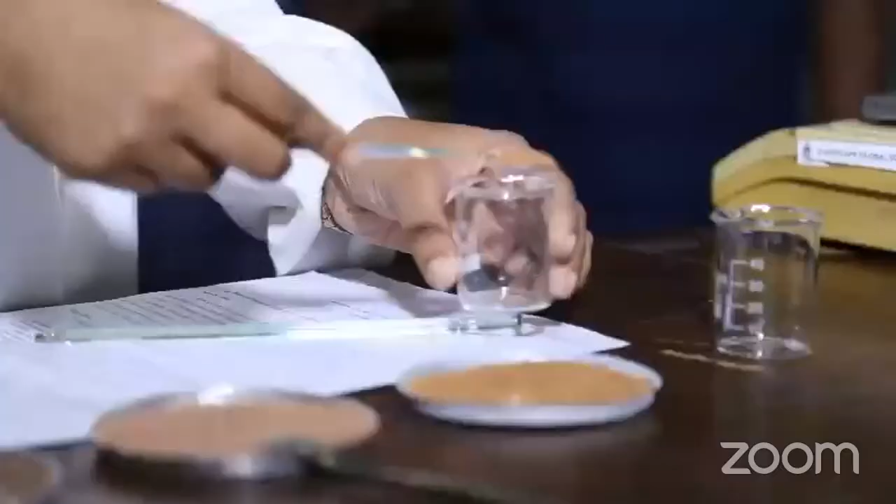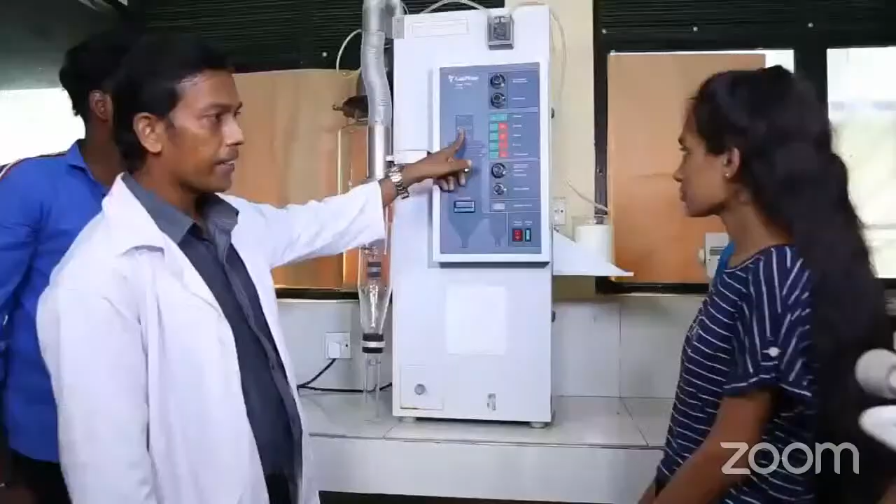After completion of my 2-year diploma in agriculture program, I entered the OUSL BIS agriculture program for the continuation of my further education. As a person who engaged in the field of education management and industry training in Sri Lanka, I serve my valuable knowledge for OUSL as a visiting academic and industrial expert on a regular basis. Highly experienced, well-behaved and well-qualified staff members at my OUSL life. I think it was a very good opportunity for the continuation of my education under the field of agriculture.

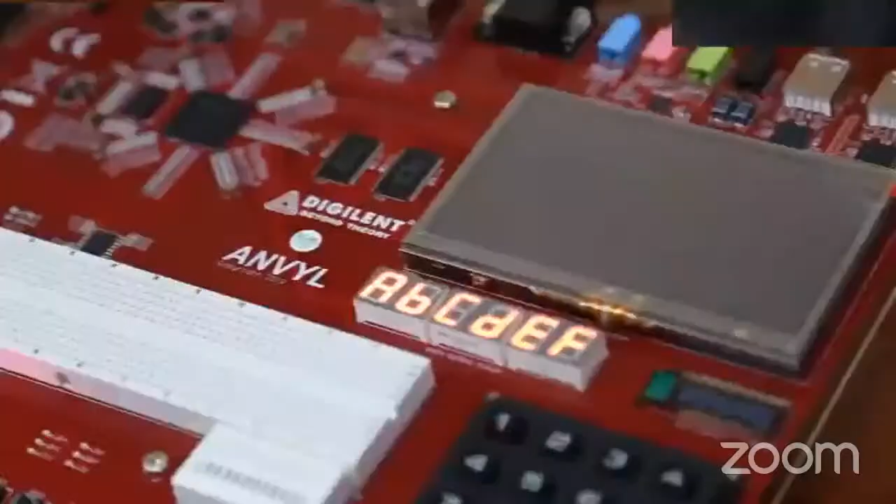Academics, I was able to understand, experiment, as well as gain the most advantages of the open distance learning model offered by the Open University. So with this model, I was able to learn myself, experiment things by myself, and make those theories into practical as an engineer. So in that way, the academics in the Open University, as well as the facilities like laboratories, library, and all the other academic staff and non-academic staff, were very helpful to make our journey a success.

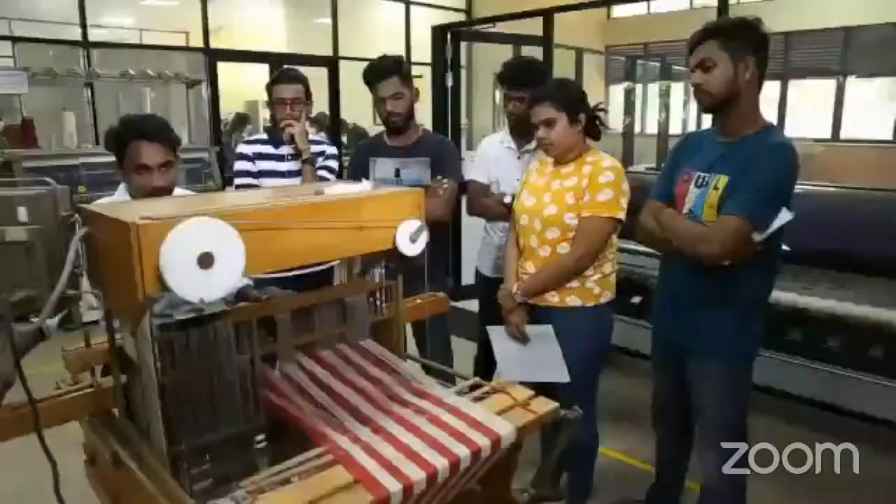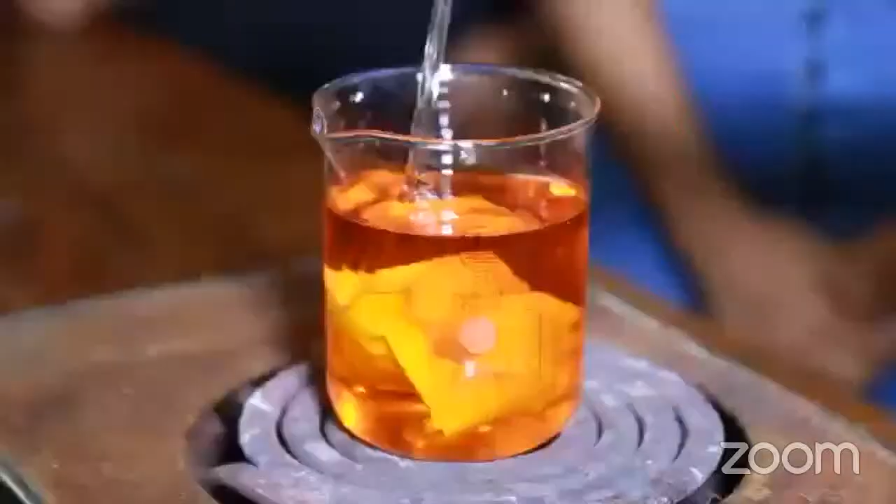Began the journey with Open University soon as I finished my A-levels. Industrial exposure we got from Open University is priceless. Knowledge I gained was able to make me who I am today. And the theoretical knowledge and the technical knowledge was very beneficial and influential. Today, I'm a successful woman in my field, in my career, thanks to the degree I obtained from Open University.

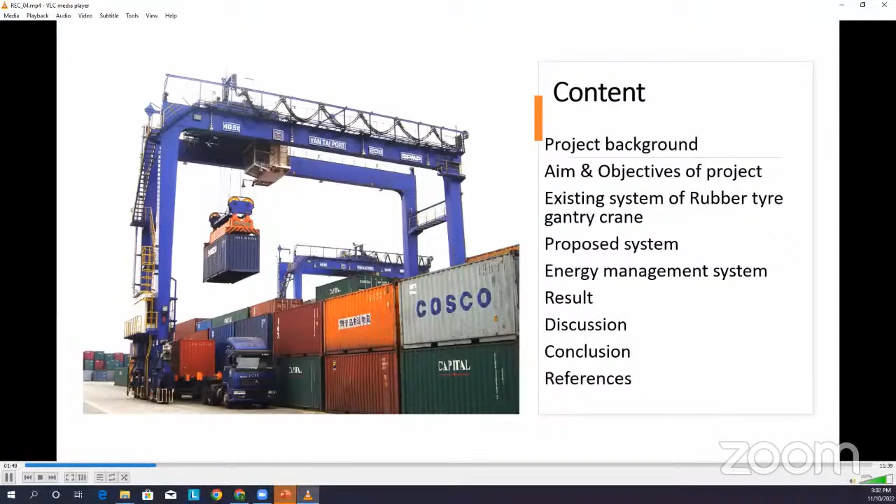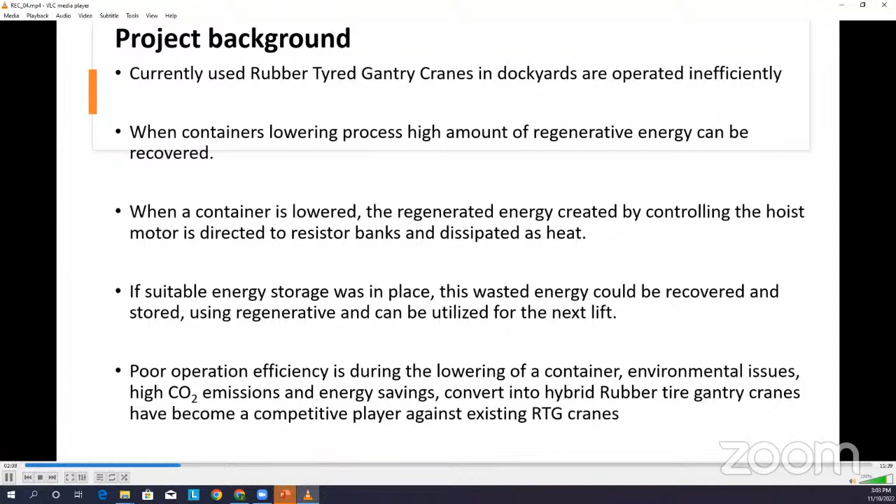And the main aim of this project is to design an energy optimized hybrid power system for rubber tire gantry cranes, and these are the objectives. Study the existing power system of the rubber tire gantry crane, design new hybrid system parameters, design a new energy storage system using battery and supercapacitor, and model the system in MATLAB and test the system.

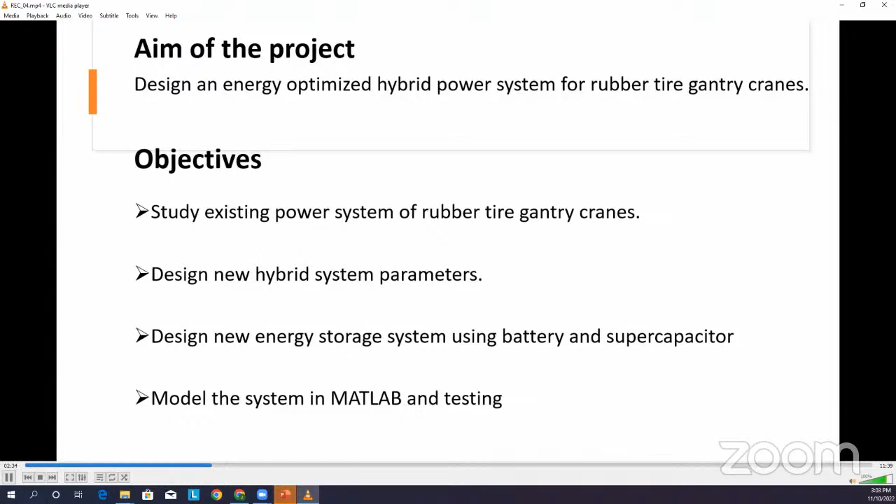Let's move to the existing rubber tire gantry crane design. Since there are a lot of operations to be handled by one RTG crane, it has several types of motors mounted on it. One is the hoist motor, and there are gantry motors and also trolley motors. These power ratings are actual power ratings used in one of the gantry cranes in a port terminal.

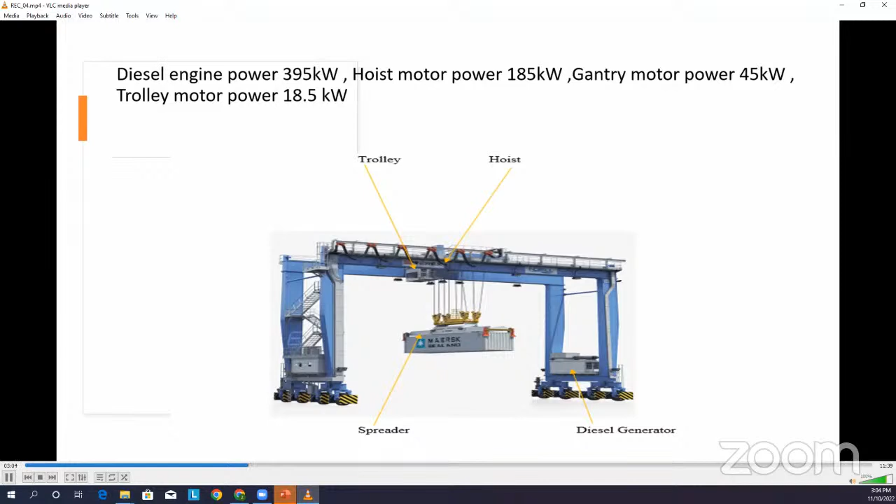And this is the new proposed system for the RTG crane energy storage system, where the conventional generators are replaced with the variable speed diesel generator with active front end unit, with which we can control the speed of the generator as well. And also all equipment is connected to the DC bus, and the battery and the supercapacitor are connected to the DC bus through the bidirectional DC-DC converters. And also the hoist motor and other induction motors are connected to the RTG crane through the inverters.

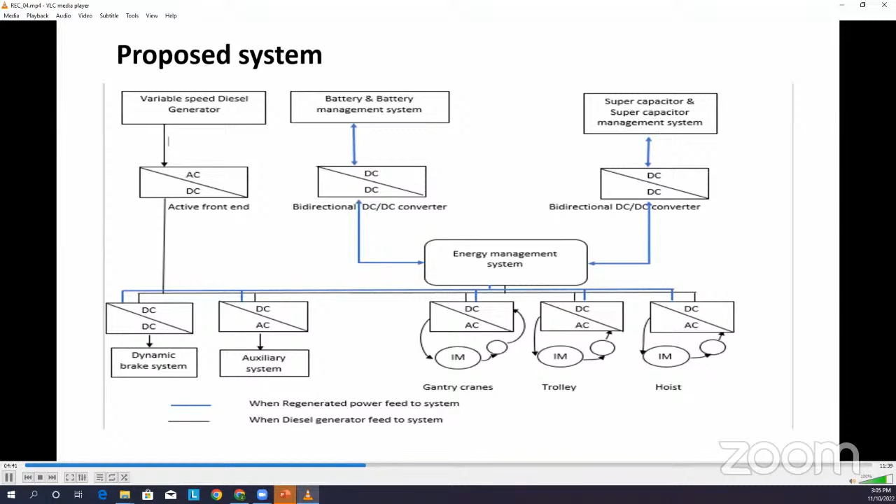In this research, we propose the quasi topology combined with the battery and supercapacitor as the energy storage devices in order to connect these inverters to the motors. Here, as the energy management system, a QZSI driving an induction motor with supercapacitor and battery is proposed. In this figure, you can see a normal quasi-topology through the three-leg inverter connected to the induction motor. Here we use L1, L2 split inductors and C1, C2 split capacitors, which replace the conventional Z source inverter with the quasi topology.

And here, the normal diode is replaced with switch S7, because in the charging process, we need to charge the battery from the motor deceleration mode, so the energy should flow in both ways. So the primary energy source here is the battery, and as the secondary energy storage, we use the supercapacitor connected in parallel with the C1 capacitor through the bidirectional DC-DC converter. So you can see the topology here.

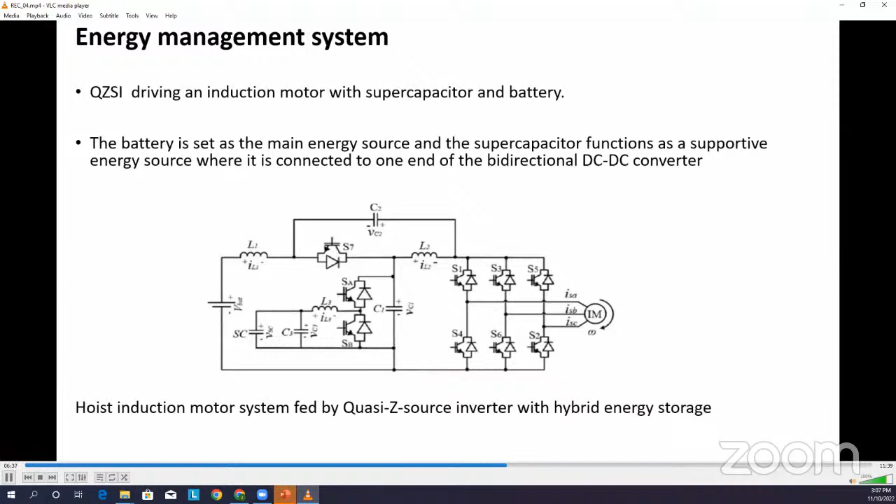Let me explain the purpose of selecting this battery and supercapacitor. The batteries are the primary energy source, which has the higher energy density, and the supercapacitor acts as a secondary energy storage source which has high power density to deliver peak load demand in a short period. Because in the lifting time we need a high amount of energy, we can take it from the supercapacitor. So here we use the quasi topology to connect these two energy sources through the inverter to the induction motor. In this figure, you can see the two modes of power flow: from the motor to the battery and supercapacitor, and also the discharging mode in the lower figure, where energy flows from the energy storage devices to the motor.

The first figure shows that once the motor is in the decelerating mode, the energy flows via the S7 switch to the battery, and as well the large amount of power flows to the supercapacitor when the switch SA is triggered, and through the bidirectional DC-DC converter, the large amount of energy is stored in the supercapacitor in that charging mode.

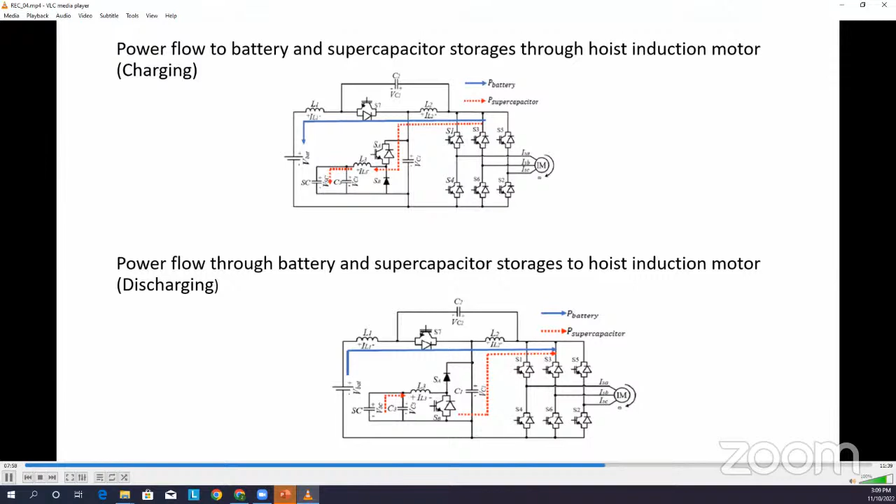And in the second figure, once the motor is in motoring mode, where it hoists or lifts the shipping containers, the battery and the supercapacitor are both discharged in order to get the energy from these storage devices, where the SB switch is now triggered, and the large amount of power flows through the bidirectional converter to the induction motor.

Here, this is the Simulink model of the induction motor that we propose. You can see here the lithium-ion battery bank is connected to the quasi topology. In the same way, the supercapacitor is also connected to the quasi topology through the bidirectional DC-DC converter, and all the capacitor voltage control is implemented in this block in the bidirectional DC-DC converter.

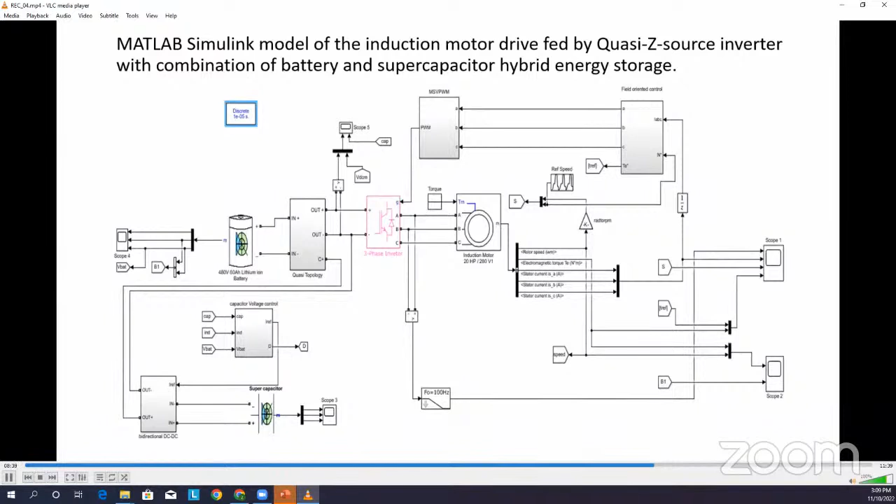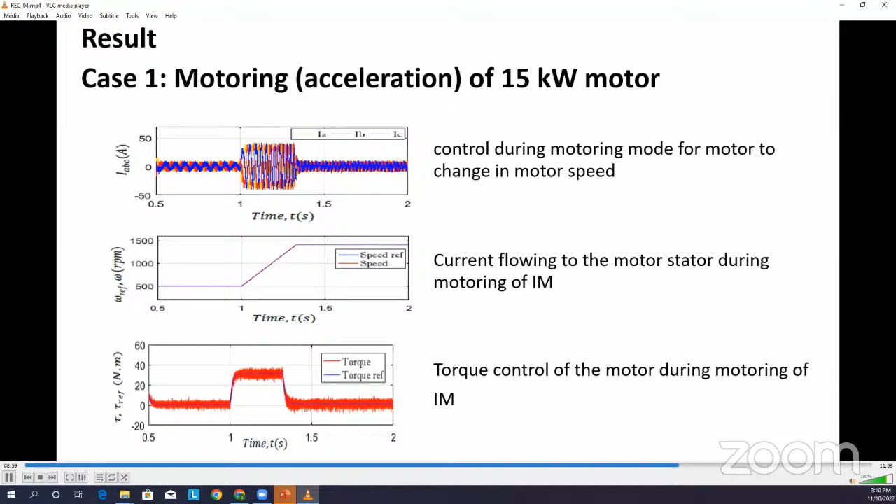And also the quasi topology is connected to the motor through the three-phase inverter, and the motor reference speed is controlled through this field-oriented control. And here you can see the motoring mode output waveforms. The first one shows you the current in the motor three phases. The second one shows you the motor speed variation in the motoring mode. The third one shows you the positive torque variation in the motoring mode.

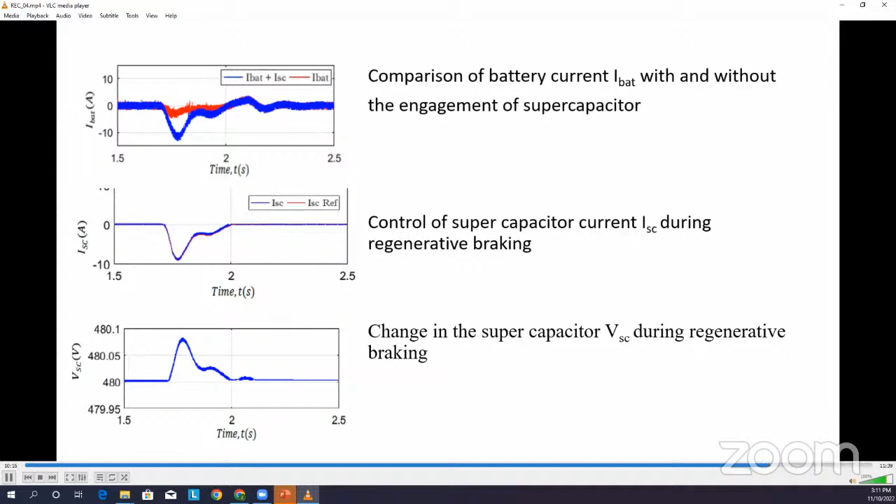And here it also shows you the comparison of battery current and supercapacitor current with the engagement of the supercapacitor. Here also battery current is low with the supercapacitor, and the current here is negative because in this mode both devices are charging. The control of supercapacitor current is shown in the second figure, and the last one shows you the voltage of the supercapacitor.

In the discussion, you can see that using the supercapacitor and the battery bank, we can propose a new energy storage system with quasi topology that can reduce the current stress of the battery during both motoring and regenerative braking. And also this application of quasi topology with the proposed hybrid energy storage method is able to reduce the number of components and conversion stages, and increase the overall efficiency.

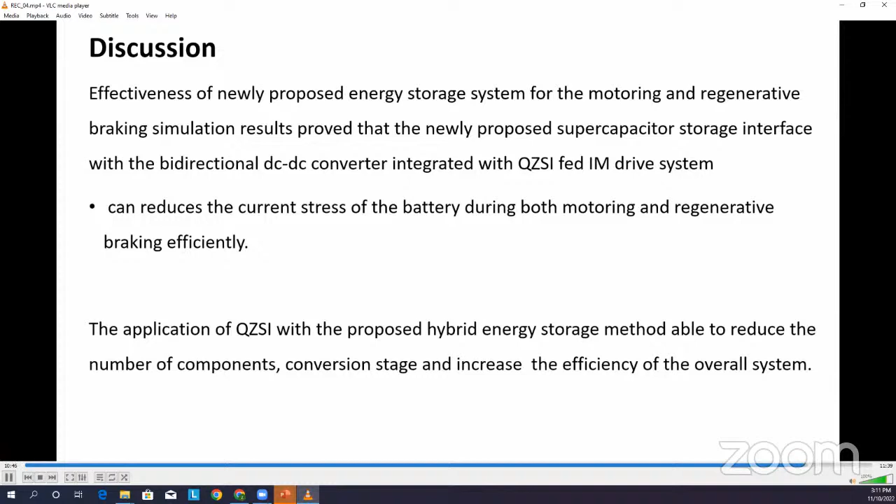As the conclusion, this research proposes a new battery and supercapacitor hybrid energy storage method for the quasi topology drive induction motor, where the battery acts as the primary power source, and the supercapacitor is interfaced to the inverter through a bidirectional DC-DC converter. And the simulation results show the advantage of having a hybrid power source, which has an impact on increasing the efficiency and also reducing the fuel consumption and emissions of the conventional RTG crane.

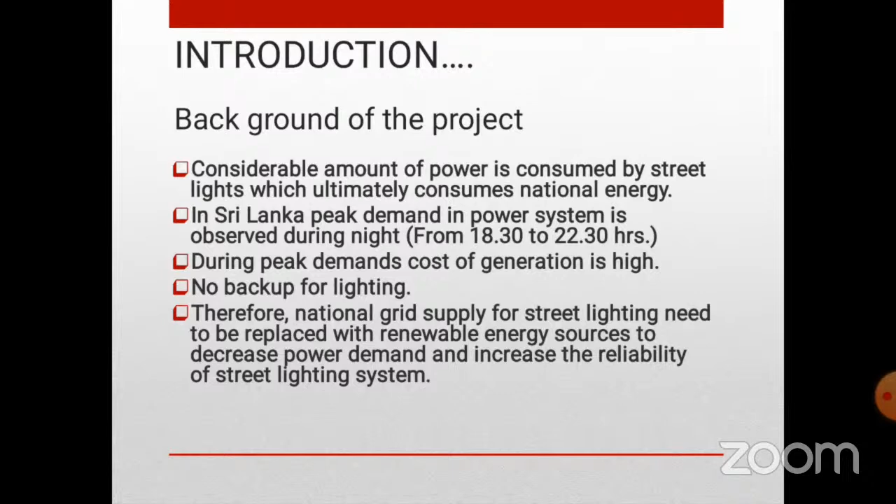And also during power cuts there is no backup for street lights. Therefore street lights need to be powered up from a renewable energy source. It will help to minimize the peak demand and also to increase the reliability of the street lights. The aim of the project is to design and implement a solar piezoelectric hybrid street lighting system. Here are some major objectives of the project.

This hybrid street light system consists of two power sources, solar energy and relative wind energy due to moving vehicles. Relative wind energy is converted into electricity not by conventional electromagnetic generation. Here we use the piezoelectric generator. A vertical axis wind turbine is used to convert the kinetic energy of relative wind energy to a rotary motion, and that rotary motion is converted to vibration by a shaking mechanism.

The vibration applies mechanical stress to piezoelectric elements, and then piezoelectric elements generate electricity. Identifying the parameters of the piezoelectric elements, designing and implementing the prototype are also major objectives of the project. This is the block diagram of the proposed system.

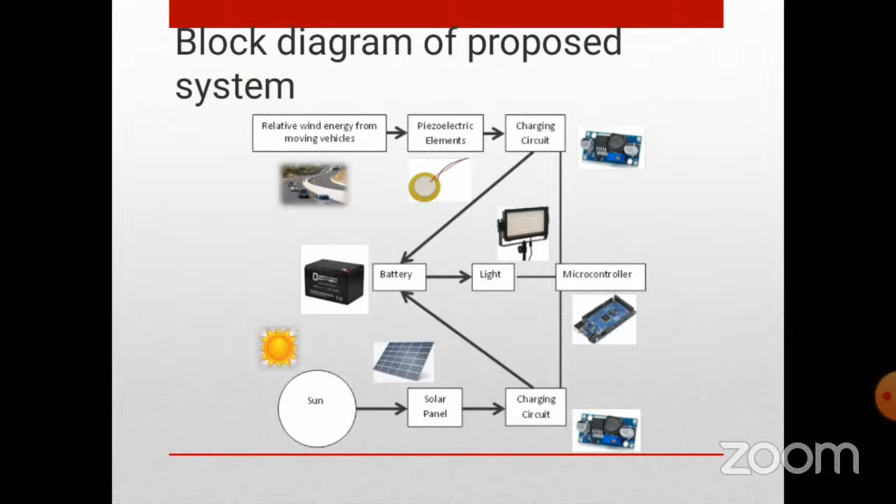The proposed system consists of below major parts. The first one, structure. The structure is made with steel L bars and a vertical axis wind turbine which is made with PVC. Generator, and the generator consists of piezoelectric elements and shaking mechanism. Rectifier and Arduino controller. Solar panel, a buck converter used to step down the solar voltage, and a rechargeable battery to store energy, and LED lamps as lighting load.

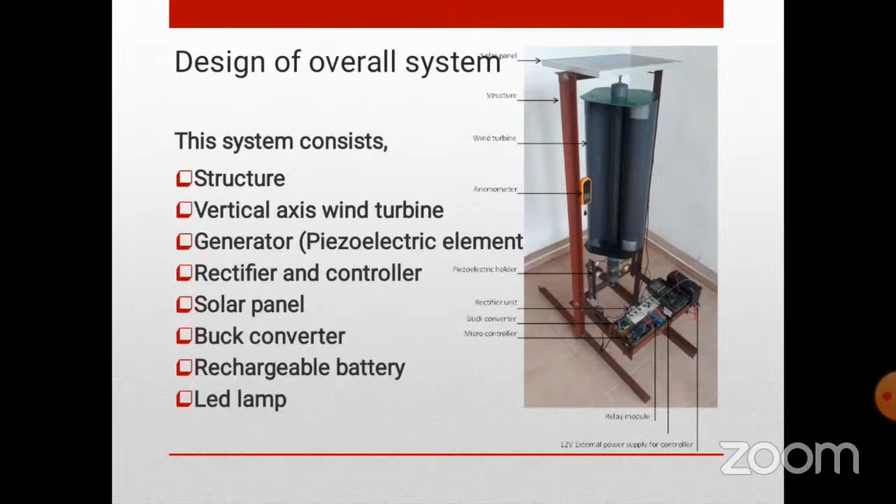This is how the overall system works. Both energy sources contribute to charge the battery. When the speed of the moving vehicles exceeds about 20 kilometers per hour, relative wind has a considerable energy. That energy is absorbed by the vertical axis wind turbine, and then the shaking mechanism converts that rotary motion into vibration. This vibration applies mechanical stress to piezoelectric plates to generate electricity.

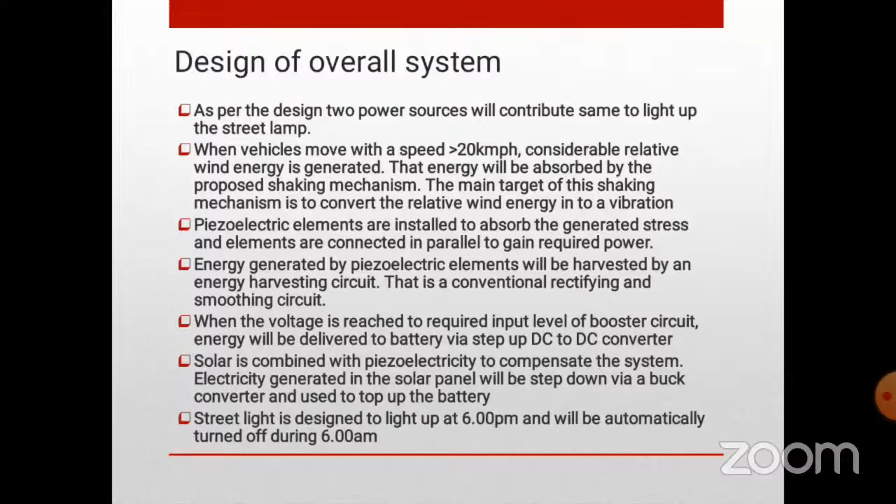When the turbine rotates, the repulsion force between rotor magnets and spring blade magnets results in the vibration, and the magnet on the free end performs as the tip mass for the spring blades. That helps to continue the vibration until the rotor magnet applies repulsion force again and again.

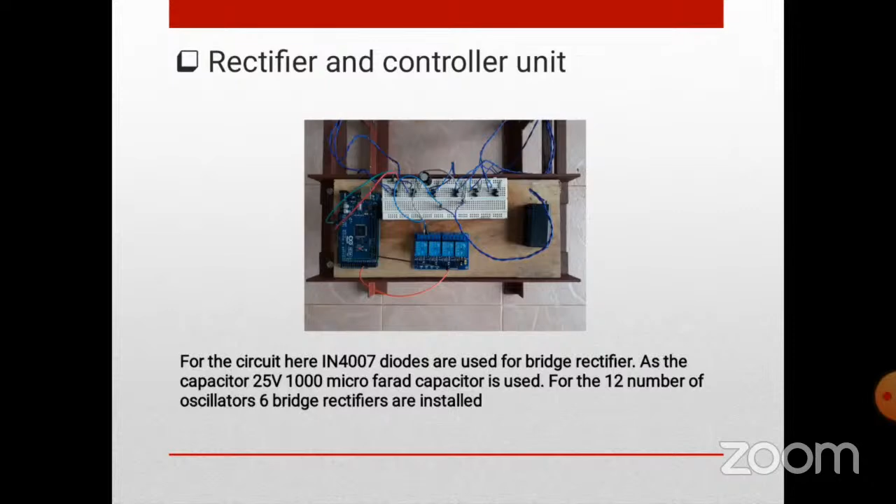This is the rectifier and controller unit. The AC output of piezoelectric plates is converted to DC and stored in the battery by this rectifier and controller unit. The Arduino microcontroller measures the voltage of the capacitor, and it controls the discharge of power to the battery and the lighting circuit as well.

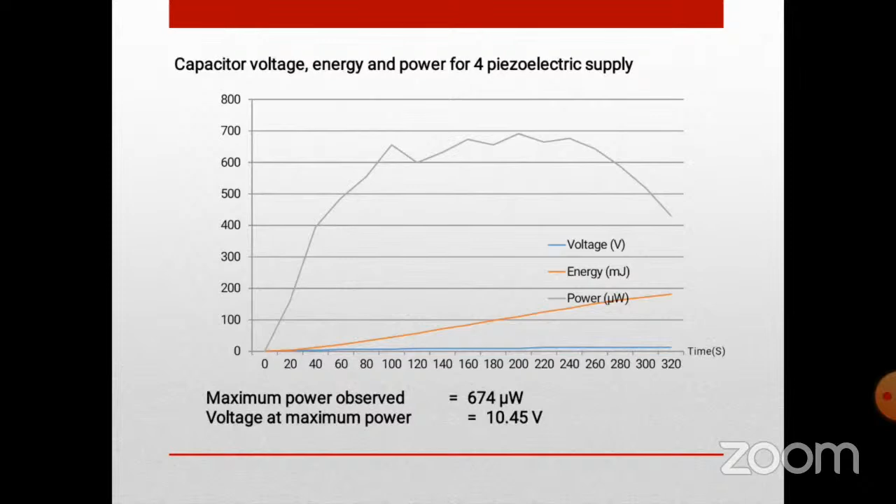The power generation of piezoelectric elements available in the market is very low, and it is very difficult to handle piezoelectric elements. The ceramic layer of these piezoelectric plates cracks due to overstressing, and when it cracks, it drops its power generation capacity. The solar energy conversion was not a big task, and the main focus was developing the piezoelectric generation.

For the prototype, we bought piezoelectric plates from the online market, and those were customized for several other applications. None of those were made for power generation, and we had to select the most suitable one, but they are not the perfect selection for this design. That is why the power generation is comparably low. But we can add more piezoelectric plates together to gain more power, like PV cells in solar panels.

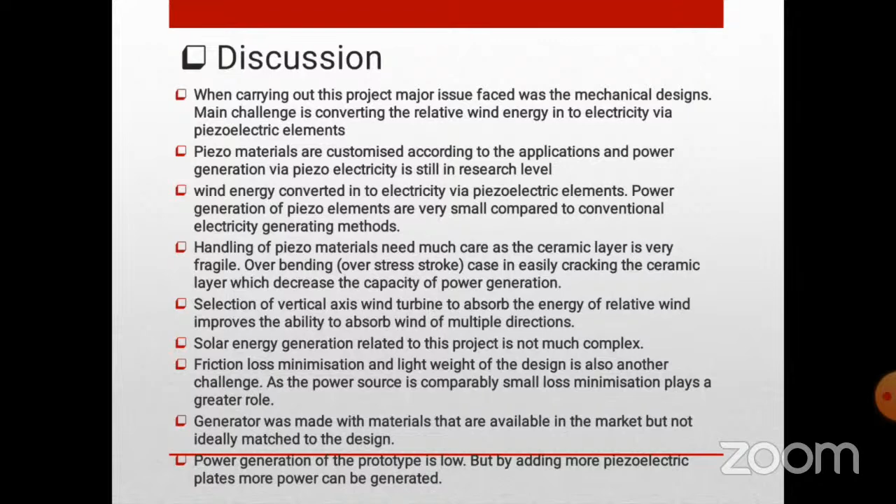Solar charging only occurs at daytime, and piezoelectric charging occurs throughout the day. By adding more piezoelectric plates to the generator unit, it is possible to increase the power generation throughout the day.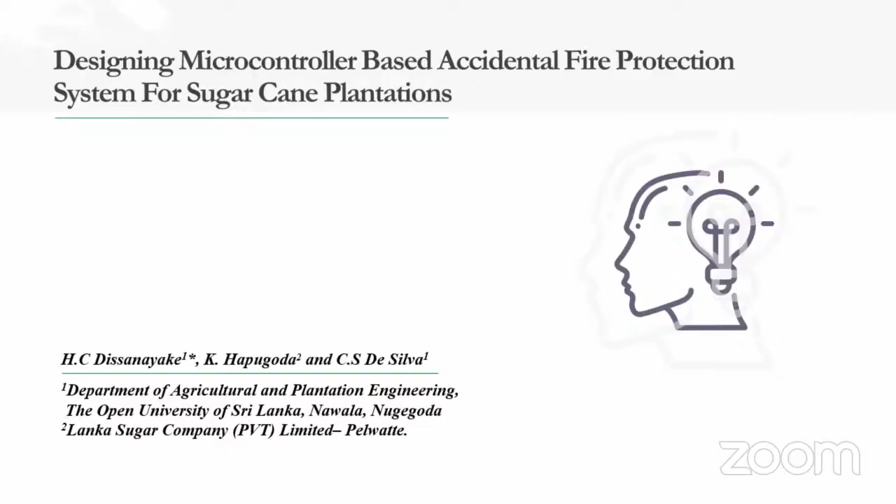These are the few facts about how sugarcane burning interferes with sugar production. Sugarcane is the main economical crop in the Monaragala district, and sugarcane burn is an undetermined sugar loss in the sugarcane industry. Large quantities of dry leaves can be seen in sugarcane fields, so a small fire can turn into a big fire in a matter of seconds.

Burning turns the sucrose contained in the plant into acid. When sugarcane burns, damaged cane stalks get infected by Leuconostoc bacteria, which is responsible for production of dextran. This causes problems such as elongated sugar crystals, increase in viscosity of juice, and blockage of filters. Burning can directly decrease mill and boiler performance, and mills and shredders can be damaged.

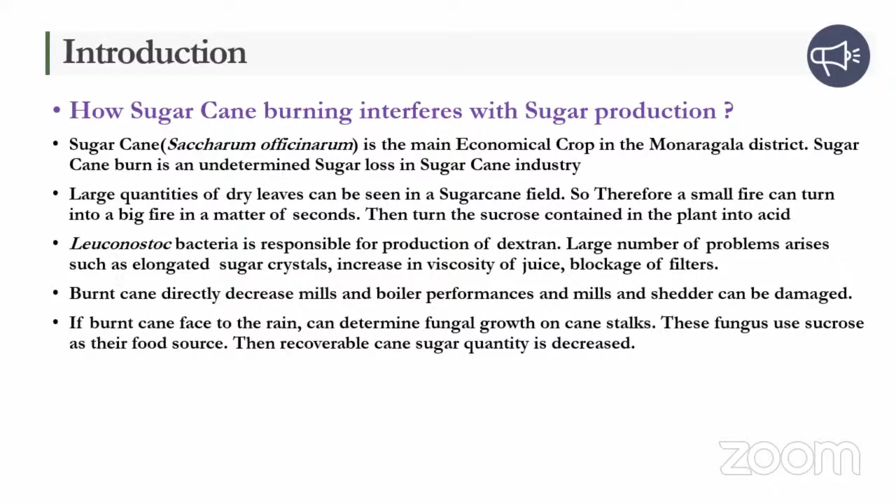The heat generated destroys all living plants and organisms that contribute to decomposition of the soil surface. Burnt cane can directly decrease mill and boiler performance, and mills and shredders can be damaged. If burnt cane gets rained on, it can cause fungal growth on cane stalks. These fungi use sucrose as their food source, reducing recoverable cane sugar quantities.

The reason to develop this project is that at present, accidental fires are controlled by the Fire Brigade of Lanka Sugar Company Private Limited. The fire detection method is: if fire is present in the sugarcane field, persons on duty in the field inform the fire unit. So fire identification, informing the fire unit, and response time of the fire unit to control the fire is too high. Because of that, the field was already damaged to a notable level by the time fire units reached it.

The proposed solution for that problem is to design two systems: fire detection with fire prevention protocol, and a notification system to notify the fire brigade. The fire detection system is installed in the sugarcane field, and the fire notification system is installed in the fire brigade office. The overall system has two separate parts: the field system and the fire control unit system.

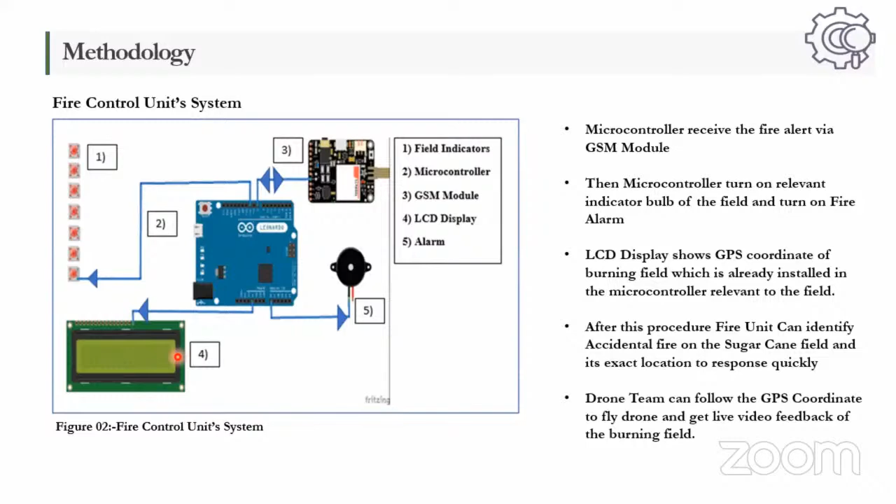Sensors used in this project were 5-volt sensors, and the output voltage of the sensors was also 5 volts. When installing sensors in the field, a 12-volt input card was designed to prevent voltage drop due to the length of the signal wires.

This is the voltage switching process of sensors to the microcontroller unit. This is the 5-volt sensor; it turns on a relay, and this relay switches 12 volts to the 12-volt input card. The 12-volt input card converts 12 volts back to 5 volts and sends it to the microcontroller. Optocouplers are used to separate the 12-volt and 5-volt sides.

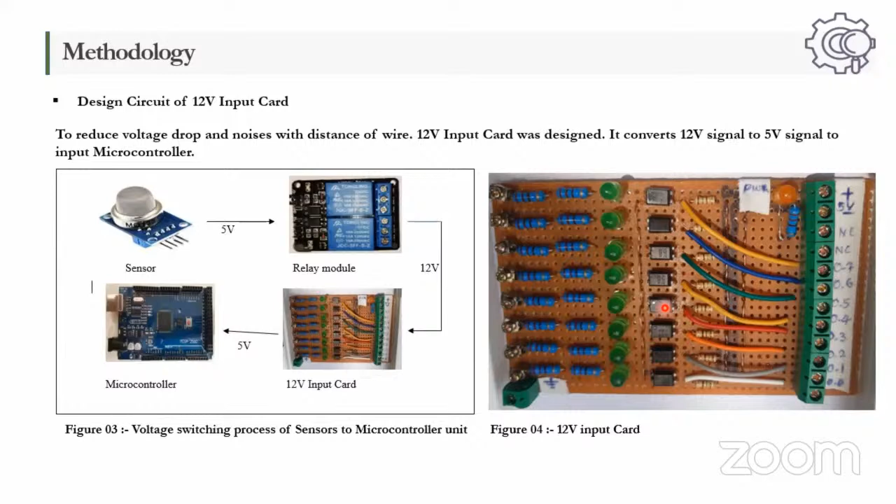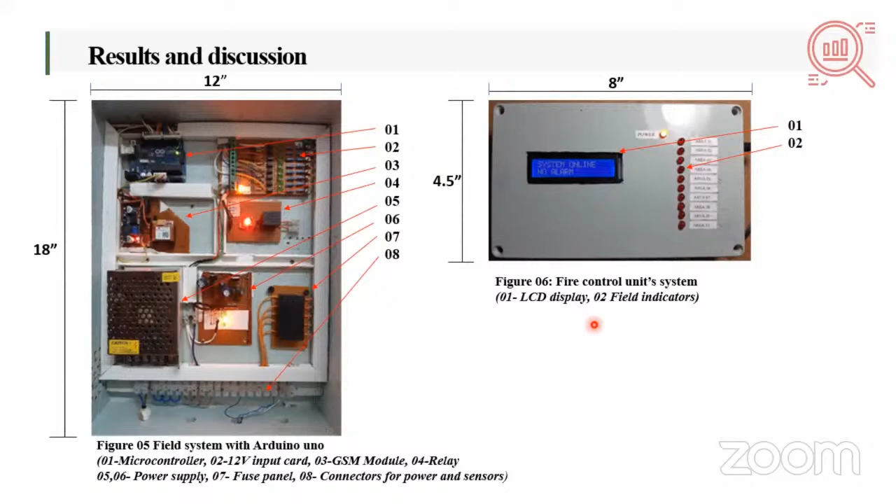These are the pictures of the prototypes. This is the field system with Arduino Uno, and this is the fire control unit system.

To determine threshold values of the sensors, 6 gas sensors are used. A threshold value is a level or limit on a scale; when the threshold is reached, something else happens or changes. In this case, the threshold value is the sensor value at which smoke is detected.

Area A shows the heating stage of the MQ series gas sensors. According to the graph, heating time is 330 to 360 seconds. Area B shows sensor values in clean air, and area C shows sensor values at detection of smoke. 250 to 300 values are used as the MQ2 sensor threshold value, and 600 to 650 values are used for MQ135 sensors.

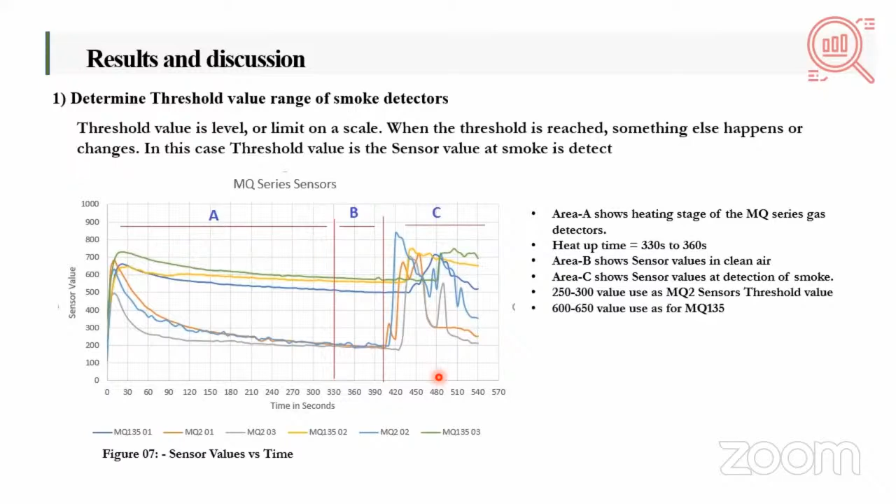Infrared and passive infrared sensors are used for flame detection. IR sensors have an onboard potentiometer to adjust sensitivity. Using these potentiometers, sensor trigger points are set to trigger at 200 lux flame intensity at 1 meter distance. PIR sensors are adjusted to trigger at 7 meters at 200 lux flame sensitivity.

Testing the GSM module for sending and receiving fire alerts: the SIM800L module sent the fire alert, and the SIM900A module received the fire alert. The LCD display successfully shows the GPS coordinate of the burning field and turns on the area indicator for the relevant field.

These are the implications and limitations of this project. As implications, it can be used as a fire detection and prevention system in agricultural fields, animal farms, homes, office complexes, and warehouses. It can also be used for controlling wildfires in national parks like Redwood National Park, California, and as an irrigation control system.

The limitations of this project are that the initial cost is high to install at the field. Technical knowledge is needed to install the system, and the sensor needs to be cleaned twice a month to remove dust.

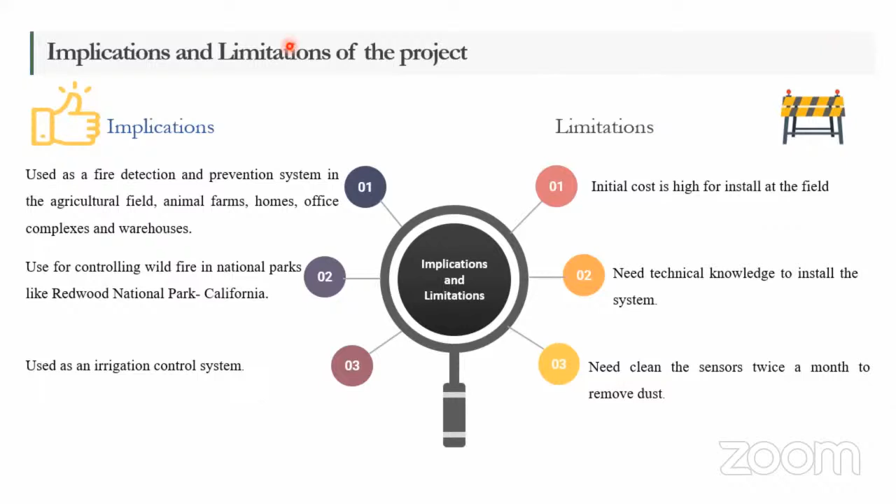This is the end of my presentation. Thank you all.

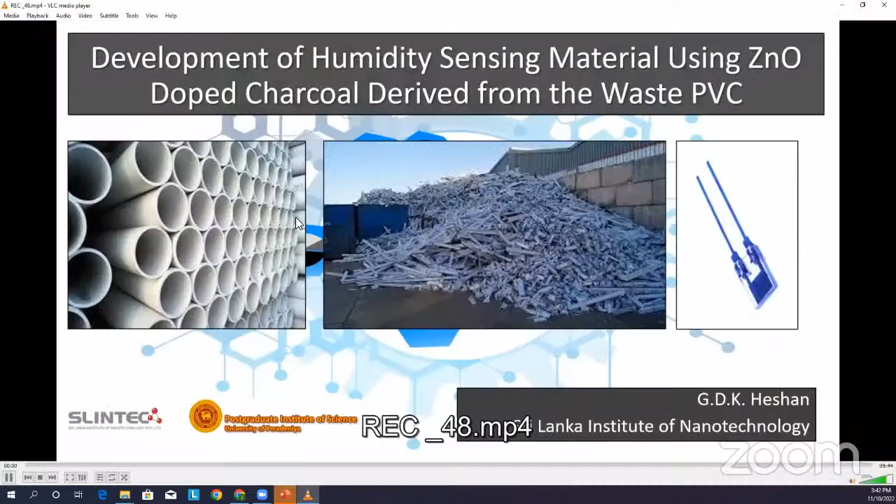Good morning everyone. My research topic is development of humidity sensing materials using zinc oxide doped charcoal, which is derived from waste PVC polymer. I am from Slintec, and I have already registered at the Postgraduate Institute of Science, University of Peradeniya as a PhD candidate. These are the contents of the research: introduction, background and motivation, methodology, experimental, results and discussion, conclusion, and references.

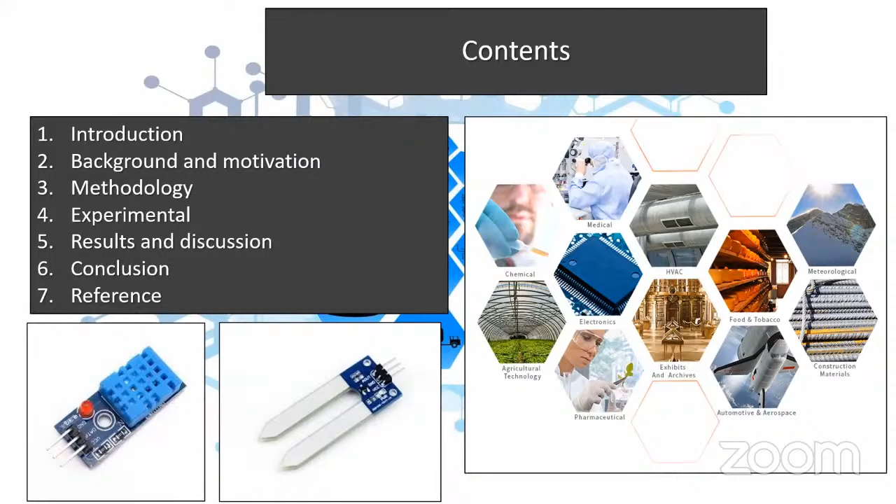Introduction: a humidity sensor is a device that senses, measures, and reports the relative humidity value of air or a controlled area, and it presents the water vapor present in a gas mixture or pure gas.

Background and motivation: normally, humidity measurements are used in various industries for storage and ongoing production. Mainly we can see large amounts of humidity sensing applications in the agriculture field and food industry. Also medicine and other industries use various kinds of humidity sensing applications. On the other hand, there are new trends in finding new materials capable of sensing humidity.

On the other hand, PVC polymer as a waste has a long shelf life because it is very difficult to deteriorate or decompose, somewhere near 100 years. So there is a high impact on the environment when the polymer enters the waste stream. It is good if we can convert or pyrolyze PVC to prepare a conductive carbon material, which is used as a humidity sensing material.

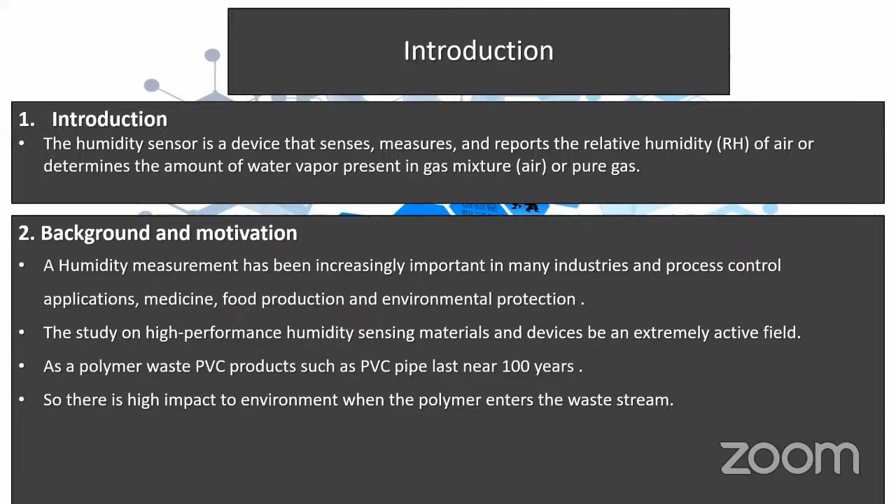Methodology. In this research, we use waste PVC and we doped it with zinc oxide. We pyrolyze the PVC in an argon environment to 600 Celsius, and hydrothermal treatment was done to prepare zinc oxide nanoparticles on the surface of the PVC polymer.

Using this composite material, we prepare an electrode, which acts as the sensor. The two electrodes will contact the prepared polymer composite material. In the experimental part, we determine several physicochemical characterizations of the material. Also, we use a humidity sensing performance investigation to determine the sensing properties.

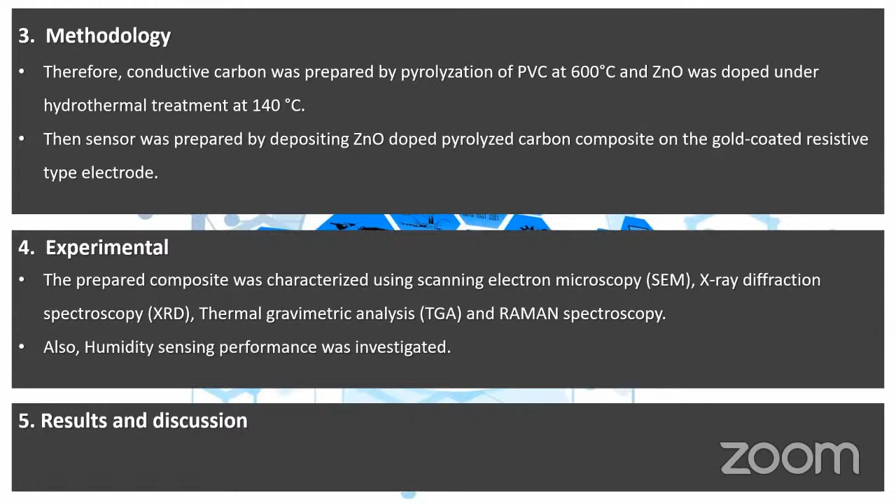As physicochemical characterizations, we use scanning electron microscopy to determine the morphology of the prepared material, and X-ray diffraction spectroscopy, and for the thermal profile, thermogravimetric analysis, and to determine the portion of graphitization, Raman spectroscopy. Next one is results and discussion.

We can see the results for the XRD and FTIR spectroscopy. In figure 1, graph A, we can see the heat-treated PVC, and in B, the raw PVC. We can clearly see graphitization has happened due to the thermal treatment. Also in FTIR,

near 1263, in figure 1D, raw PVC had a C-Cl bending bond, and after heat treatment, the Cl is removed as HCl and generates a cyclic structure, which is conductive. We cannot see the Cl bond in the treated PVC sample.

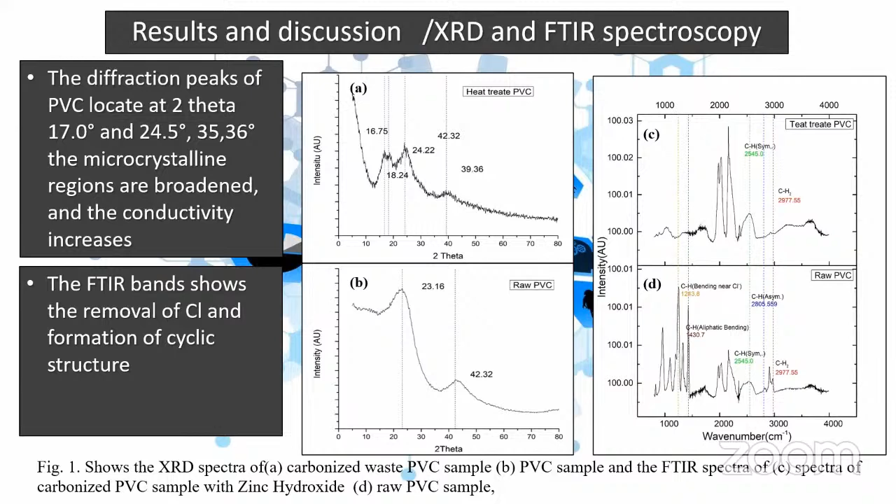You can clearly see the HCl removal in the region 350 to 450, a huge mass loss on the TGA curve. This is due to the dechlorination. Normally this happens near 450 and 850 Celsius in PVC polymer.

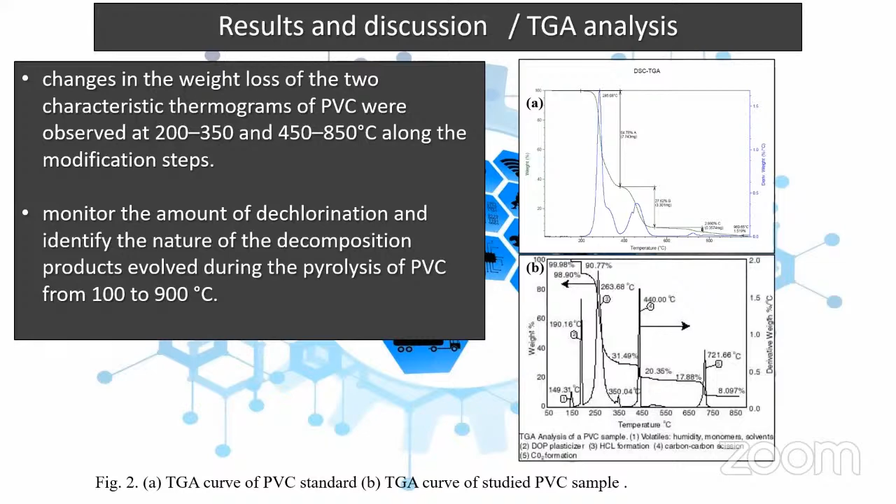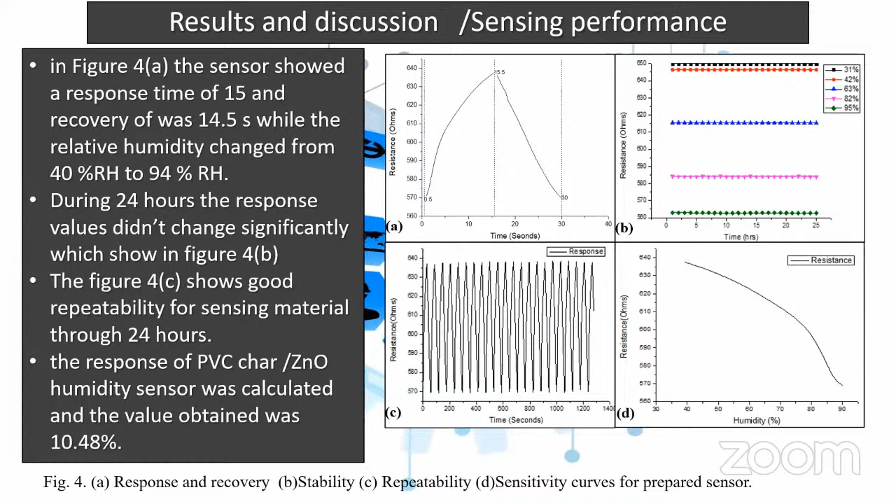Conclusion. As a conclusion, we can say waste PVC charcoal and zinc oxide can be used effectively to prepare low-cost and high-performance humidity sensors, and it also shows good repeatability and wide response. With normal sensors we see response at the upper level or the lower level in relative humidity sensing.

Titanium dioxide-like semiconductor sensors normally respond at the upper level, and tin oxide normally responds at the lower level, but in this material we can see a good total range in humidity sensing, and also the 24-hour response value is good compared to references. These are my references.

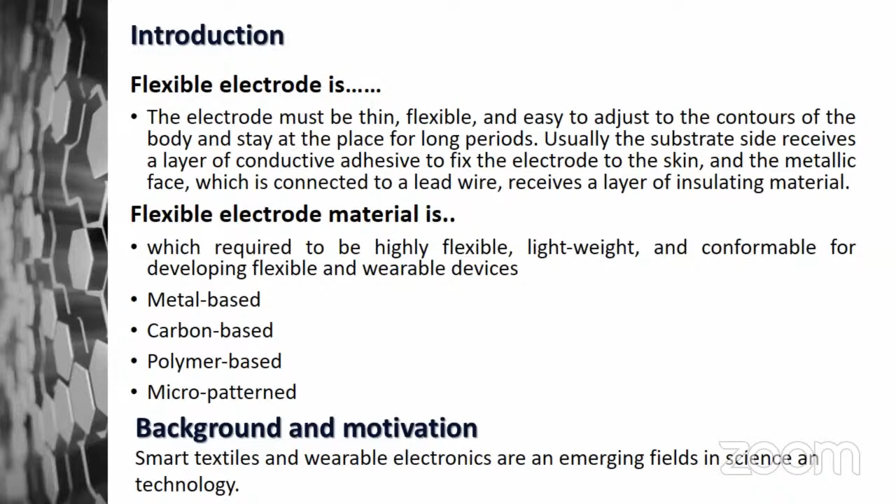There are several examples of flexible electrode materials: metal-based, carbon-based, polymer-based, and micro-pattern materials. Background and motivation. Normally, we use these flexible electrodes as components of textiles or wearable electronics such as smartwatches and belts. Smart textiles and wearable electronics are emerging fields in science and technology in this era. Methodology. We can see the schematic illustration of the preparation of expanded graphite from natural flake graphite. We use the graphite from Kahatagaha. Firstly, graphite must be converted to powder by pulverizing using a ball mill or disc mill.

After that, we use an acid mix for the graphite, and the thermal expansion assisted with chemicals is done using a controlled tube furnace at 600 Celsius. At that temperature, the chemicals react inside the layer structures in the graphite, and they expand. This happens within 3 to 5 minutes. It is a very quick process.

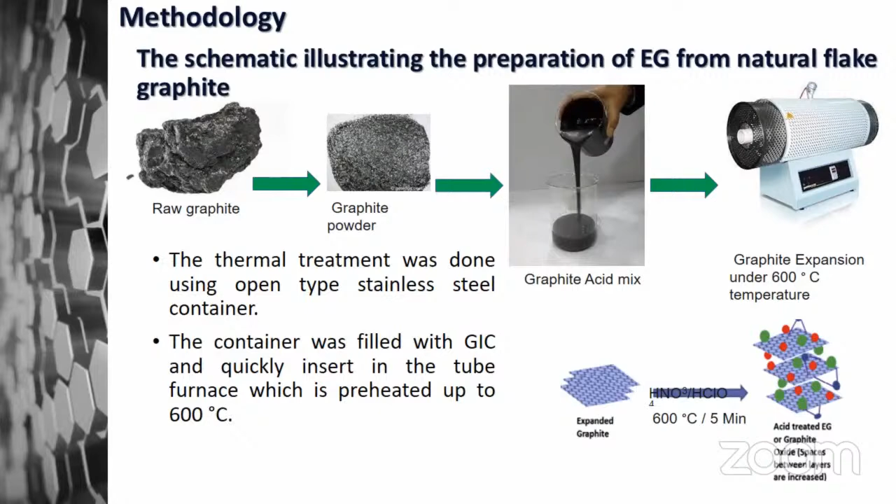The mixing of PVAC and acetic acid: to generate the composite material, we must mix the graphite with a flexible material, which in this study is PVAC, polyvinyl acetate. Polyvinyl acetate cannot dissolve in water, but can be dissolved in acetic acid. We wash the graphite and then mix it with PVAC and acetic acid.

In the drying process, we use a thin layer of PVAC and expanded graphite on Teflon sheets, because the Teflon sheets withstand 120 Celsius, and then we put it on the hot plate to evaporate the acetic acid. After the evaporation, we can take the thick film of PVAC and expanded graphite polymer using a press.

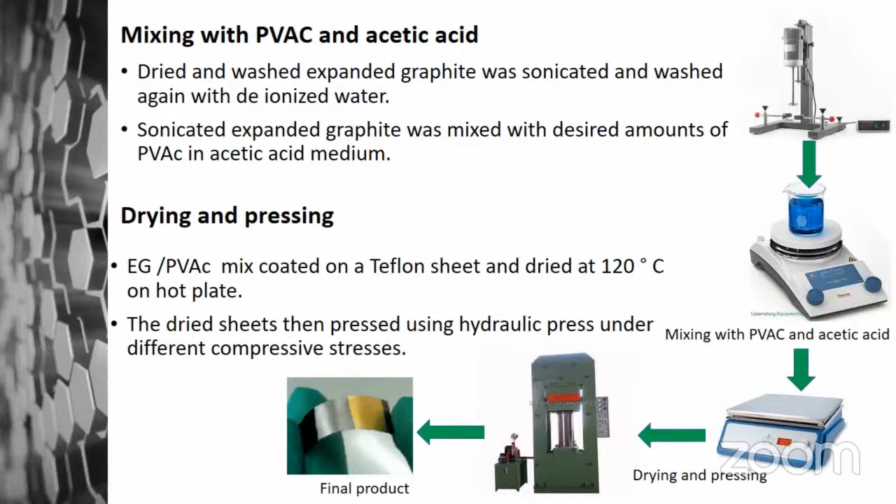We can prepare thin films of expanded graphite and PVAC composite material. This is the final product. We can see the flexibility of the final product. Experimentally, we try to analyze the polymer material for the specific characteristics which we can use to prepare an advanced type of flexible electrode material.

The first one is resistance change with increasing moisture, because if we use it on a moisture-full surface like sweat or water, we must check the resistance change. Also the compression load, because in flexible materials the wear and tear is high. The third one is resistance change with tensile stress, and we also compare the resistance change with PVAC composition,

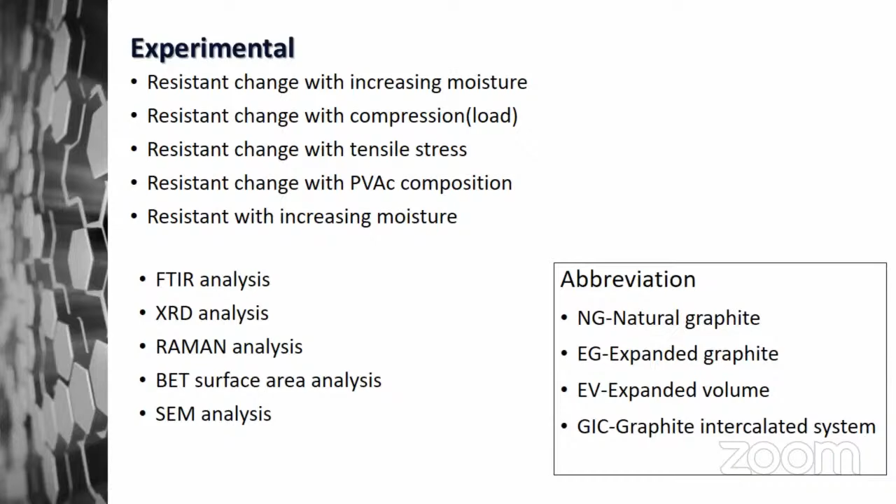because with higher PVAC composition, the expanded graphite ratio is low, which will tend to decrease the conductivity and increase the resistivity. Also the resistance with increasing moisture, because the adsorption of moisture will also affect the conductivity of the composite material. For the expanded graphite, we did FTIR analysis, XRD analysis, Raman analysis, BET surface area analysis, and scanning electron microscopy analysis. These are my abbreviations.

Resistance after the applied load: the best PVAC composition, PVAC to graphite ratio, is 1 to 3 by mass ratio. We can see two graphs. The first graph is resistance before and after the 25 ton load, which means the resistance value decreases after the applied load.

This may happen due to the compression of the materials inside the composite. In figure 3, you can see the resistance change with the applied load. When we apply the load, the graphite structure will come close and the resistance will gradually lower. In figure 4, we can see the resistance change with the stress in megapascal values and also the strain.

After a small amount of strain, the structure will lose the conductivity, and after some time the structure will fail. We can see the graph in figure 4. The point, we can see, is 0.04993 strain. This small area is expanded in figure 5 with the change of the resistance and strain with the applied stress. We can clearly see after a specific point the material will lose the conductivity and become resistive.

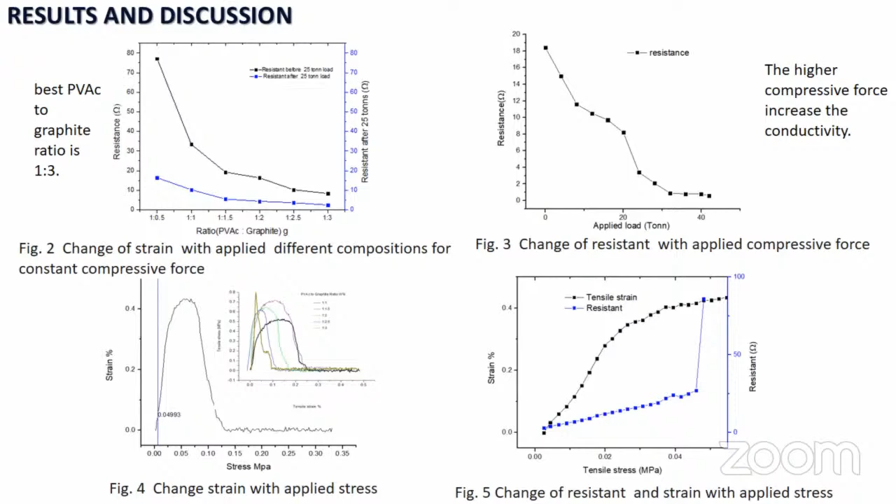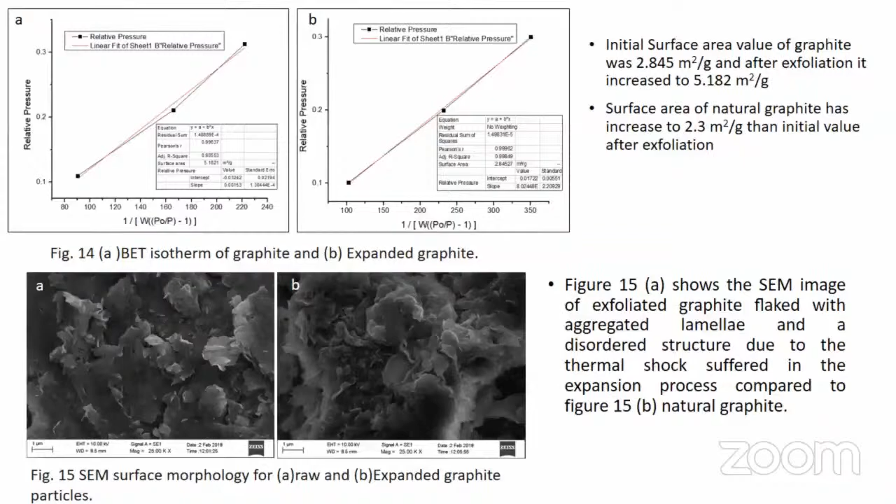Also in figure 15 we can see the surface morphology of the expanded graphite and raw graphite. In the first image we can see a low amount of flake-like structures on the surface, but after the exfoliation we can see a high amount of flake-like structures in expanded graphite.

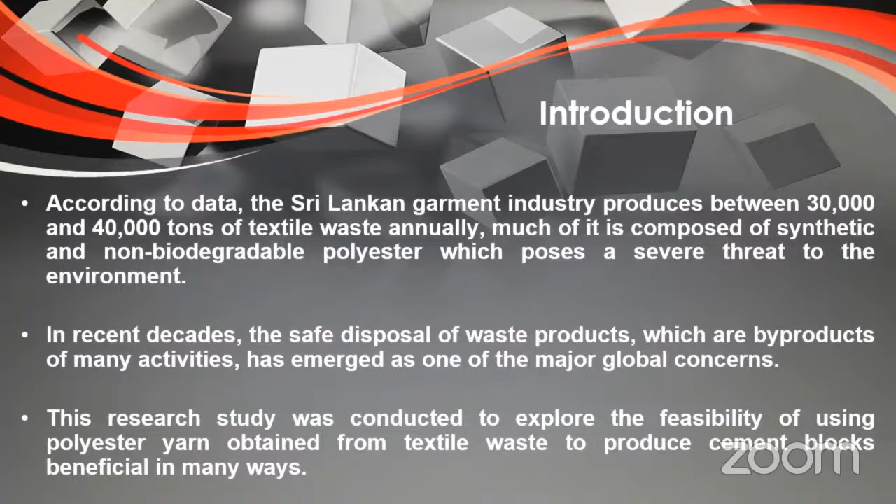A significant threat to the environment is posed by the 30,000 to 40,000 tons of textile waste produced by the Sri Lankan garment industry each year. Much of it is made up of synthetic non-biodegradable polyester. The proper disposal of waste, which is the result of several activities, has become one of the main global challenges in recent decades. This study was done to investigate whether it was possible to make cement blocks that were advantageous in various ways by using polyester yarn made from textile waste.

Aim and objectives. The aim is to investigate and determine the optimum mix proportion to produce cement blocks with sustainable use of polyester yarn waste. As for the objectives, it is to evaluate and compare the suggested block's compressive strength, moisture content, water absorption, block density, and split tensile strength to those of standard blocks, and to determine the ideal mix proportion to achieve maximum use and future development.

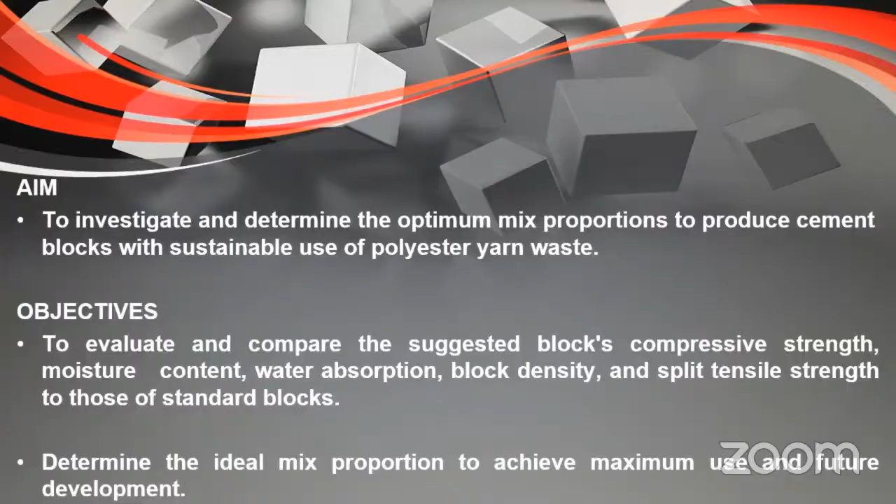Methodology. This is a brief of our methodology to achieve the objectives. For the materials, quarry dust that complied with SLS 882 and was free of hazardous materials was used as the aggregate, while ordinary Portland cement that complied with SLS 107 was used as the binder. In the experiment, polyester yarn in the form of thread was used as a direct textile waste. Following a series of preliminary tests, the ideal cement to sand mix proportion, which is 1 to 10, was chosen based on which mix proportion gives adequate strength while being the most cost effective.

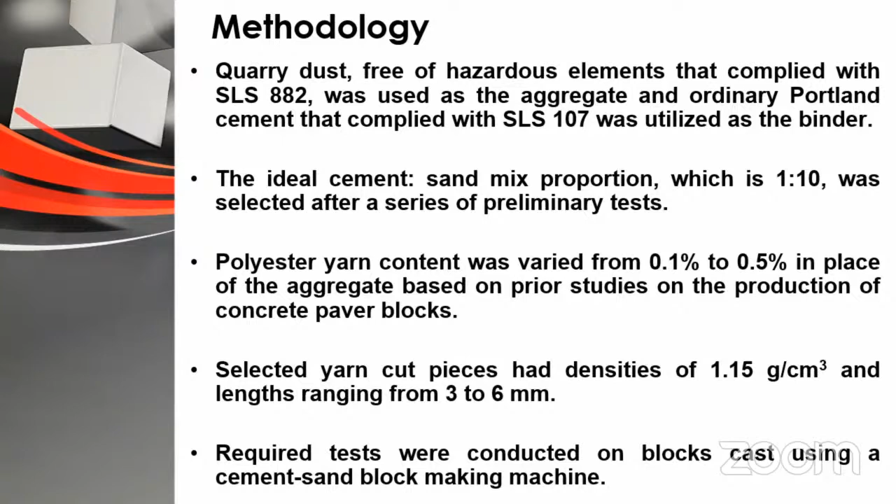In place of the aggregate, polyester yarn with a content ranging from 0.1 to 0.5% was used based on earlier research on the creation of concrete paver blocks. Selected yarn pieces ranged in length from 3 to 6 mm and had densities of 1.15 grams per cubic centimeter. Blocks made with a cement sand block forming machine underwent the necessary testing.

Sample preparation. Using this diagram, I can explain the general process for making a cement block. As you can see, it begins with the preparation of the basic ingredients, then involves blending particular substances with fiber. For a uniform consistency, it is crucial to thoroughly mix both before and after adding water.

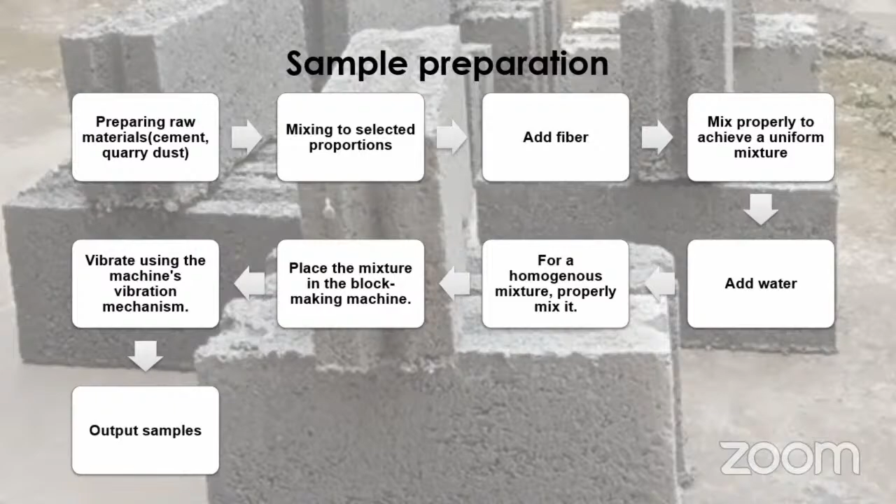Using a block casting machine with the appropriate vibration, output samples can be generated by placing the mixture on the machine. We have created the appropriate samples in accordance with the methodology to conduct the research and test the effectiveness of cement blocks for various purposes. Blocks were assessed using several tests in accordance with the SLS 855 standard.

with the fiber content. Additional compression testing was done on blocks with 0.4% yarn substitution after 2 days of curing, and the early strengths achieved ranged from 1.7 to 2.1 Newtons per millimeter squared.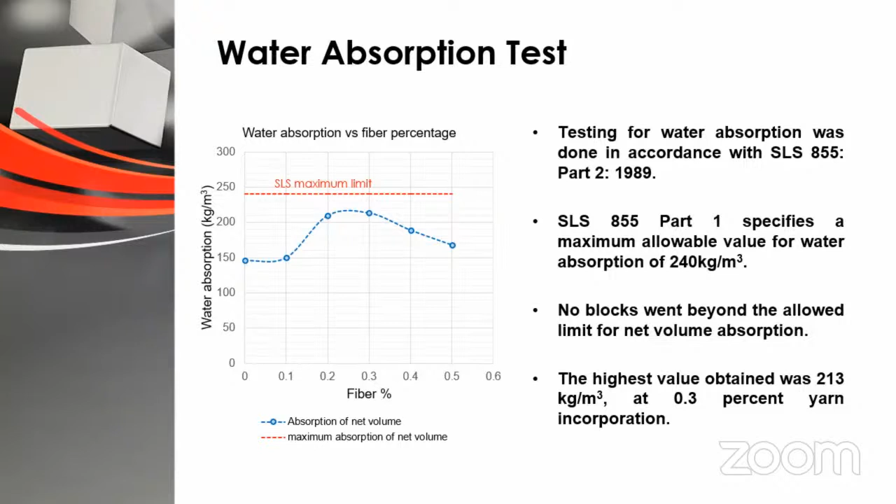Water absorption test. Testing for water absorption on cement blocks is done to evaluate the block's weather resistance and other durability factors. SLS 855 Part 1 establishes 240 kg per cubic meter as the maximum permitted value for water absorption. As in the graph, no blocks exceeded the permitted threshold for net volume absorption. The highest number for water absorption was 213 kg per cubic meter with a yarn inclusion of 0.3%.

Moisture content test. Considering the moisture content test, the maximum moisture content value was restricted at 40% in accordance with SLS 855 Part 2. The moisture content increases as the fiber concentration increases from 0.1 to 0.5, as shown in the graph. The graph shows that none of our samples, regardless of the mix ratios, fail to meet the SLS 855 maximum level.

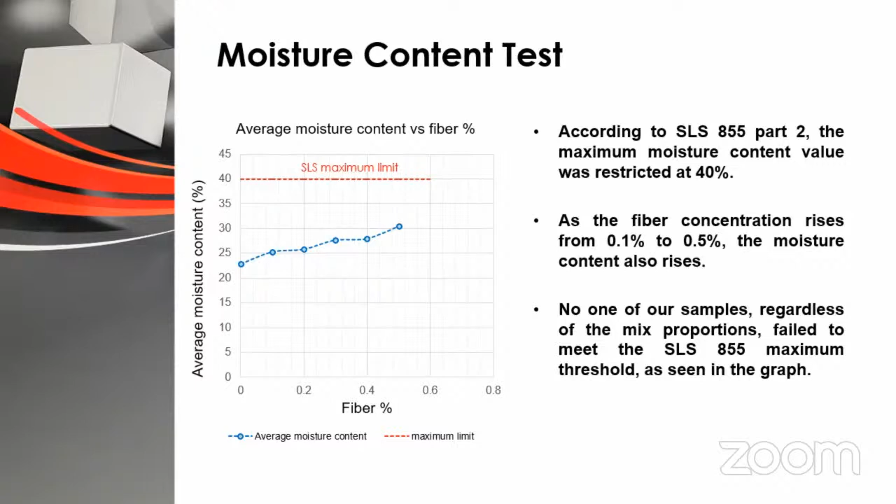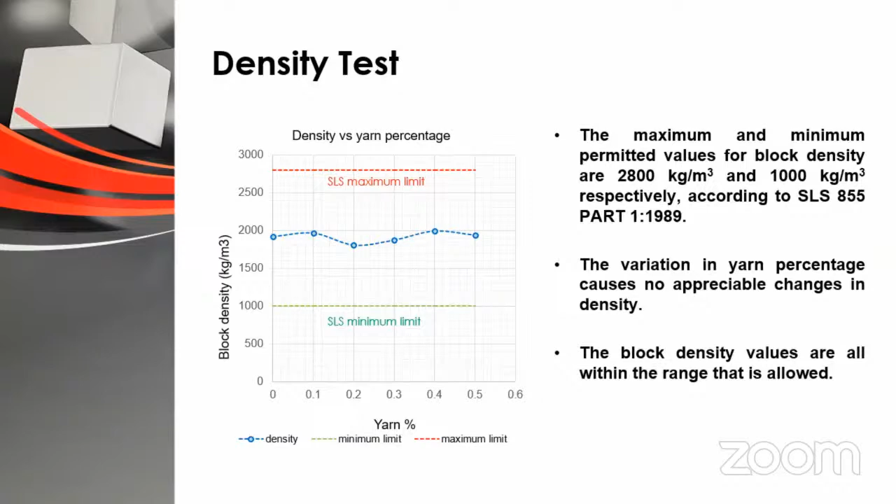Density test. The density test reveals that a denser cement block often offers more strength and fewer voids and porosities. According to SLS 855 Part 1, the maximum and minimum allowed values for block density are 2,800 kg per cubic meter and 1,000 kg per cubic meter respectively. As seen in the graph, there are no significant changes in density caused by variation in the yarn percentage. All of the block density values fall within the permissible range.

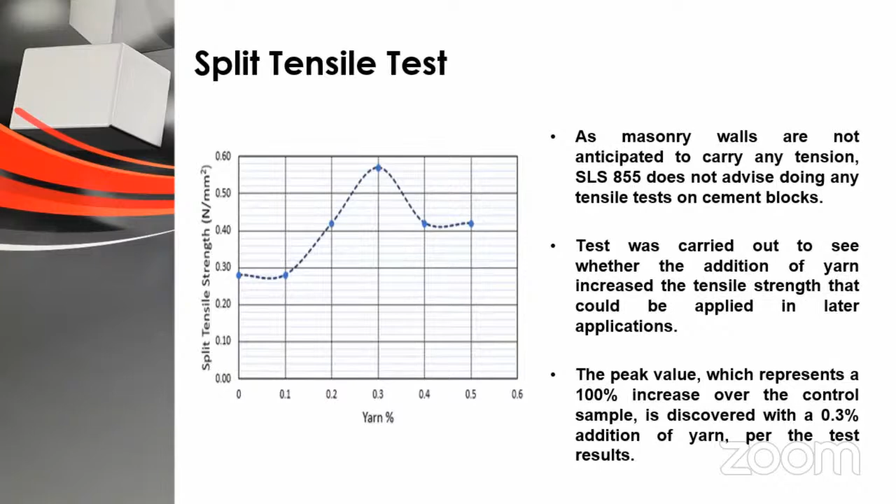Split tensile test. SLS 855 does not recommend conducting any tensile test on cement blocks because masonry walls are not expected to carry any tension. Testing was done to determine whether adding yarn improved the tensile strength that could be used in future applications. As illustrated in the graph, the test result revealed that 0.3% addition of yarn yields the highest value, which equals a 100% increase over the control sample.

We have come to the end of our presentation. Conclusions and recommendations. We have reached several conclusions based on prior findings, which I'd like to highlight. The test findings showed that the characteristics of a typical cement block were not adversely affected by the introduction of polyester yarn. The incorporation of polyester yarn into cement blocks will be able to divert yarn waste to the building sector as a long-term solution to the problem of disposing of polyester yarn waste.

The block can be utilized for load-bearing walls and other reinforcing applications since the compressive strength can be enhanced by 73% at 0.4% fiber mix fraction. Cost effectiveness is achieved by strengthening our block while maintaining a low cement to sand ratio. Based on the results of this study, future researchers are recommended to create further applications for yarn in products such as precast wall panels, ceiling boards, etc.

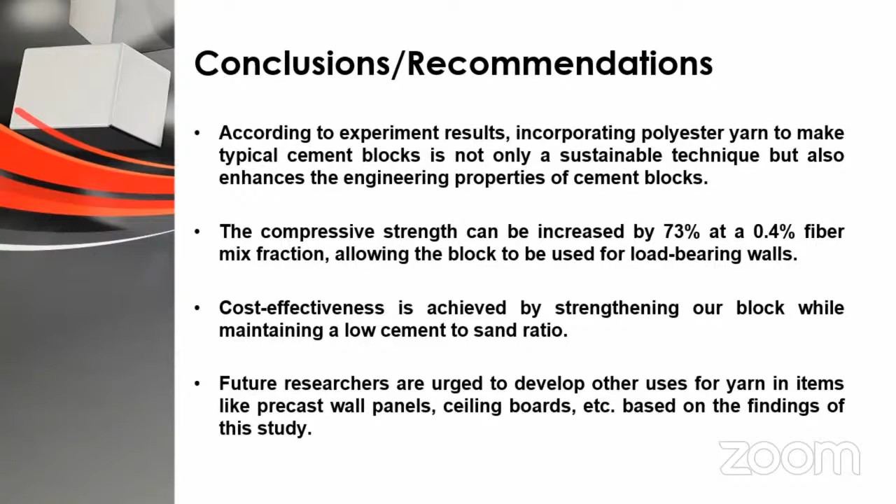How did you mix these polyester particles with the cement? Do you limit the particle size of the yarns up to a certain extent, or is there a limit for the mixing?

The polyester yarn length was 3 to 5 millimeters. For mixing, we used the hand mixing method because the polyester yarn causes chaos in mixing, but we could introduce a new method of adding polyester yarn in future research.

From a workability point of view, did you not find any difficulty? Did you check any workability parameters during mixing? No, sir, not really. But were you able to mix it well with the cement? Yes.

You said the particle size is 3 millimeters, isn't it? 3 to 5 millimeters. That is the length of the fibers, isn't it? Yes, sir.

You took that from the waste of the garment industry, isn't it? Yes, sir, from the Sinharaja factory. It is interesting research, I hope.